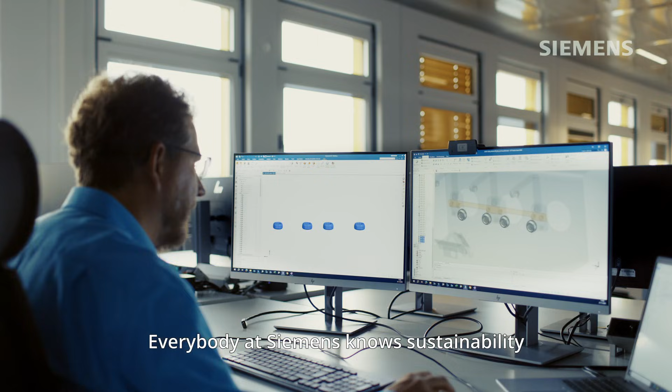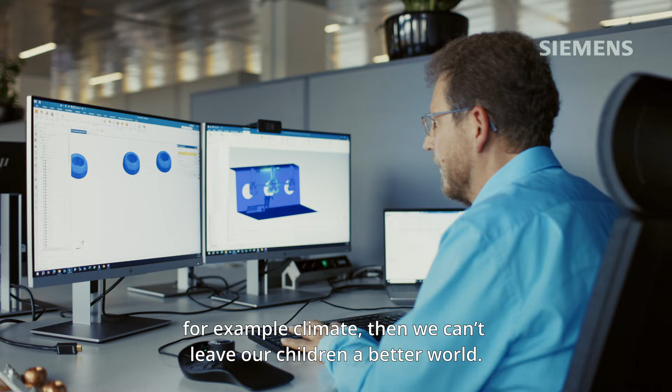Sustainability is a big topic for Siemens itself. Everybody at Siemens knows sustainability. It's needed to save our world. We have so many problems around the world, and if we neglect some problems, for example, climate, then we can't leave our children a better world. That's what I'm working for. I want to have that foresight that my children will also have a nice life, not only me. That's what drives me.

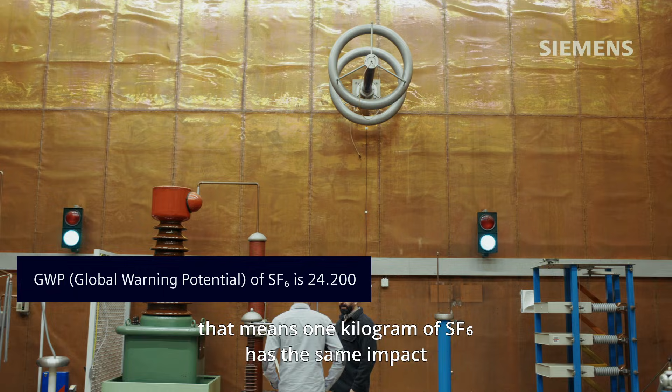The global warming potential of SF6 is over 20,000. That means 1 kilogram of SF6 has the same impact on our environment and global heating as 20 tons of CO2. And that's important for the environment and our society.

When we look at SF6, it is often used in switchgears because it has very good dielectric properties and thermal properties. But it has a flip side. SF6 has a negative impact on the environment because it has a high global warming potential. That means it will contribute to the greenhouse effect.

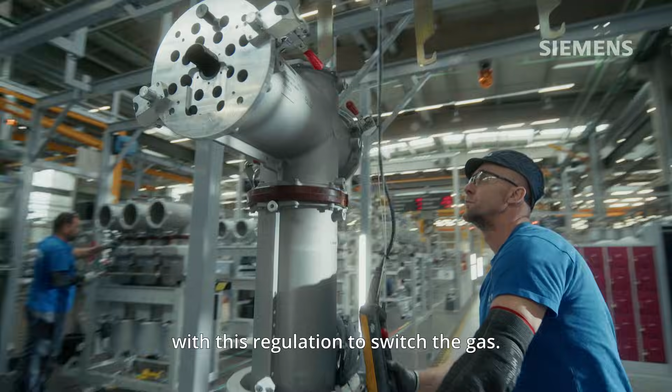And this is why, in the end, the European Union forces with this regulation to switch the gas. There was no further solution. We needed to switch, and we needed to find a solution for our future. If there's no SF6-free switchgear, the factory will be closed. We had to do something, and we found the solution.

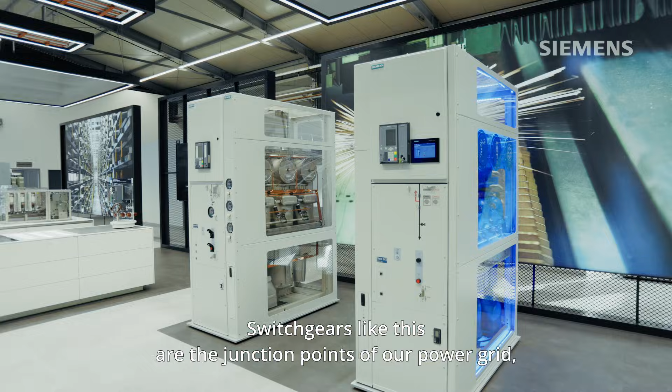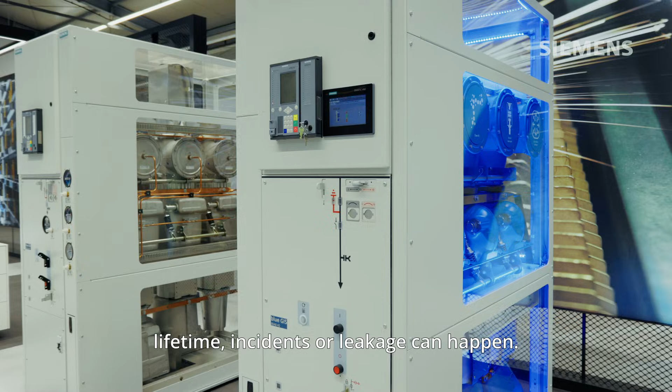Switchgears like this are the junction points of our power grid, and therefore they belong to our power infrastructure. Switchgears with SF6 are very safe, but over a long lifetime, incidents or leakage can happen. So the Blue GIS technology only uses natural gases, which are part of the ambient air. So we have no impact on our environment in case of accidents.

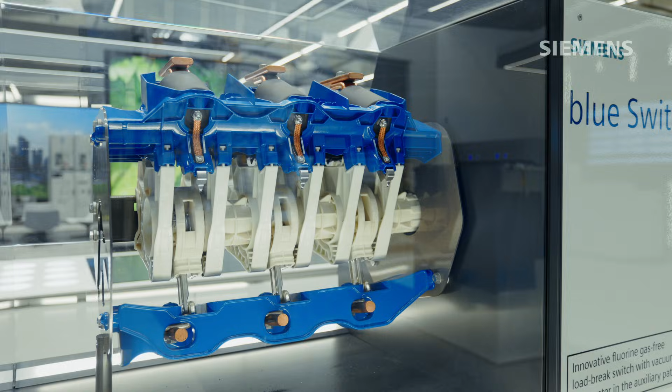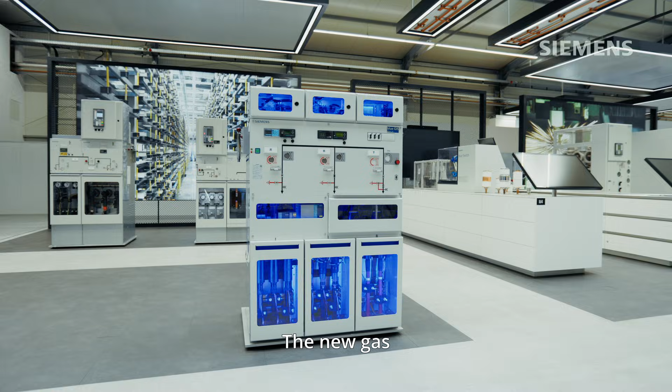For some applications in the energy business, fluorinated substances are also still used as a replacement for SF6. They fulfill the requirements, but they are not that sustainable. The new gas in the Blue products is based on a mixture of naturally occurring gases and is more sustainable. We use a gas with a low global warming potential, and it's not toxic. Therefore, it's a good solution for the environment.

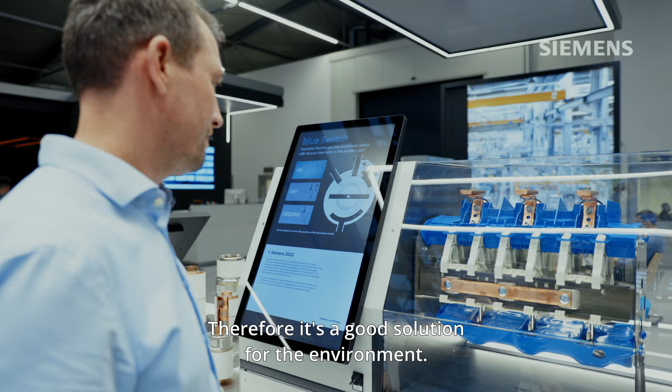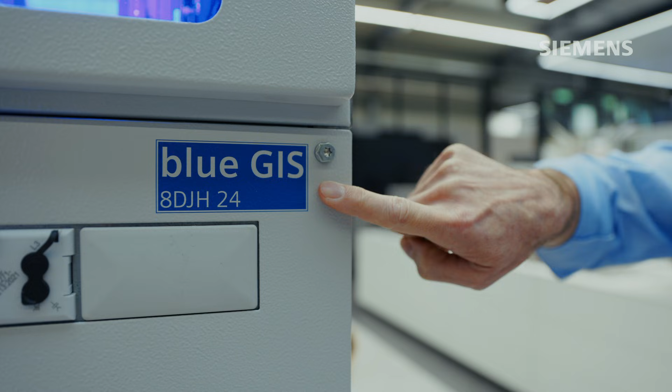SF6 is the best technical solution that you can use in a switchgear. You have small distances and can realize small products. Critical is to emit SF6 into the environment, and that is why we eliminate SF6 from the whole supply chain. Instead of SF6, in our Blue GIS, we use natural origin gases: oxygen, nitrogen, and CO2.

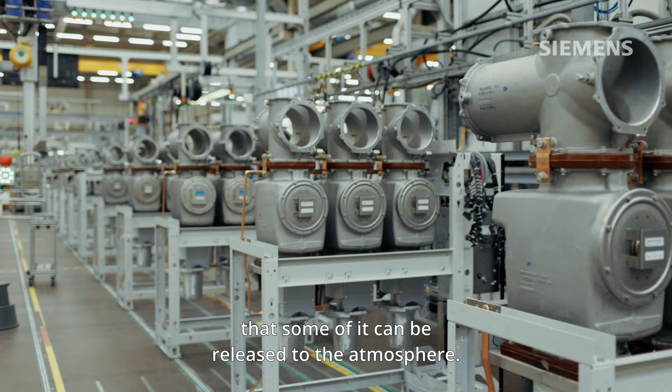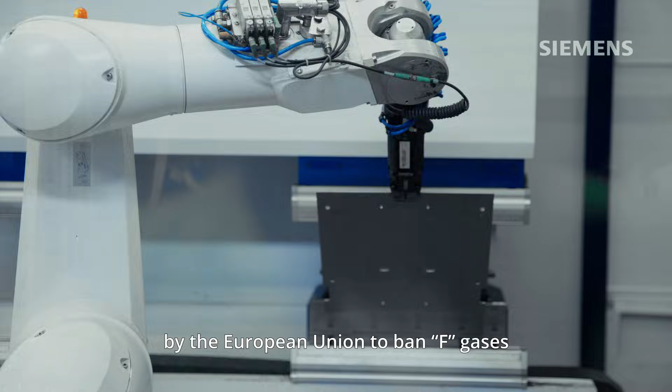And if there is no SF6 in the switchgear, there is also no risk that some of it can be released to the atmosphere. We didn't develop this gas. It's part of the surrounding gas, so nearly perfect for us, but maybe a challenge for others. It has been decided by the European Union to ban F-gases because F-gas-free technologies have reached application maturity, because we have been working on it for a couple of years, and now the time is right.

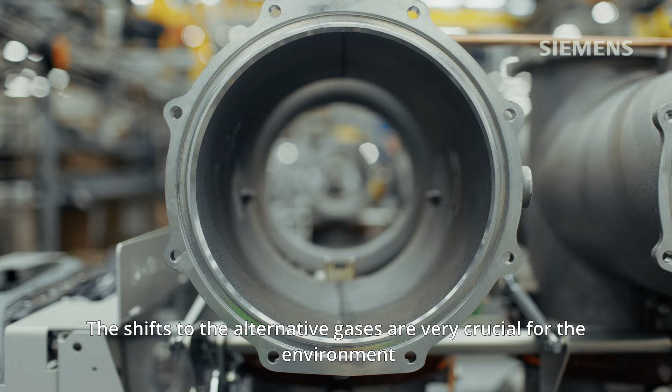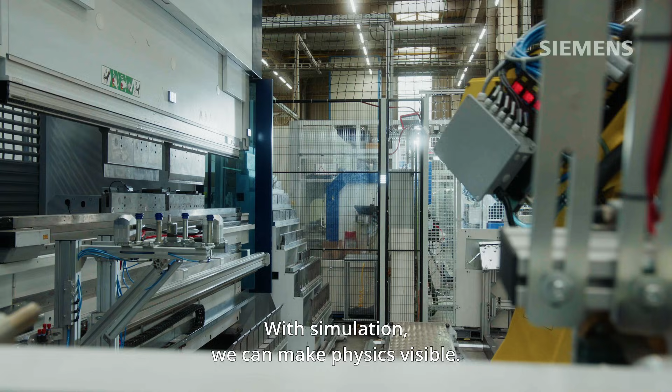The shifts to the alternative gases are very crucial for the environment and sustainability. There are also technical challenges. We have to understand and address them to be ahead and succeed. With simulation, we can make physics visible. We can look into our products and see what has happened. We combine physics and we can help our designers.

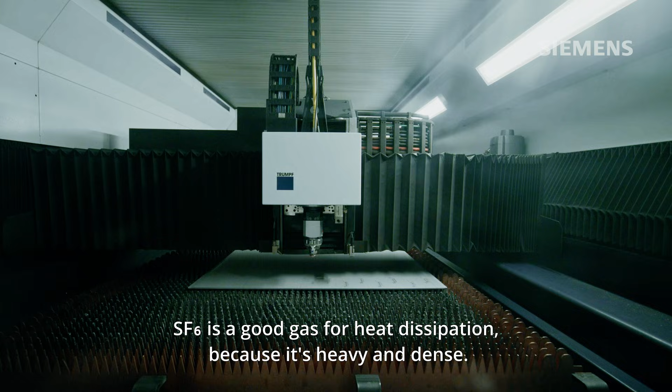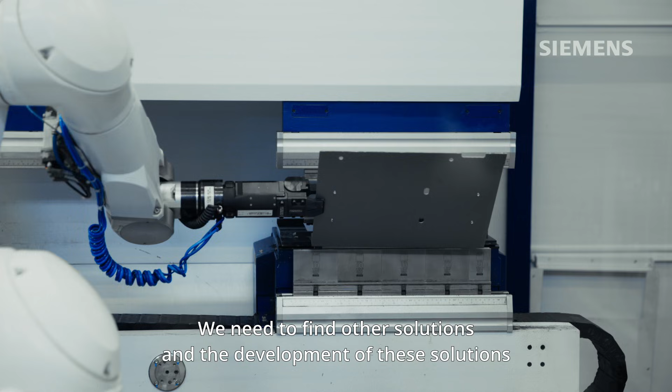SF6 is a good gas for heat dissipation, because it's heavy and dense, and that's not the case for natural origin gases. And if you want to do it with natural origin gases, we have to take care of heat dissipation. We need to find other solutions. And the development of these solutions is supported by Damien's multi-physics thermal simulation.

Hi, I'm Damien Barron, I'm a simulation engineer, and I'm a member of the R&D team in GIS. I am doing multi-physics simulations that support our design teams. They are simulations where you can combine several physics, and I am also doing innovation projects.

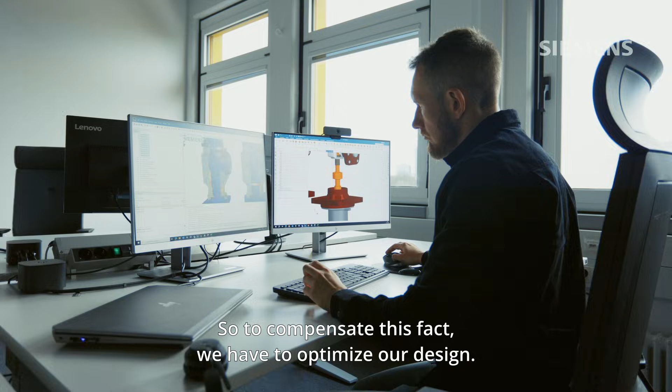From the temperature rise point of view, SF6 had very good thermal properties regarding the flow, and our new gases don't have such good properties. So to compensate for this, we have to optimize our design, meaning the current path and housing, and add more heat transfer possibilities.

When we faced this challenge, the temperature rise simulation really helped us, because with this multi-physics simulation, we could analyze the magnetic field and reduce the heat source on one hand, and on the other hand, we could optimize the flow, work with heat sinks, and optimize the design.

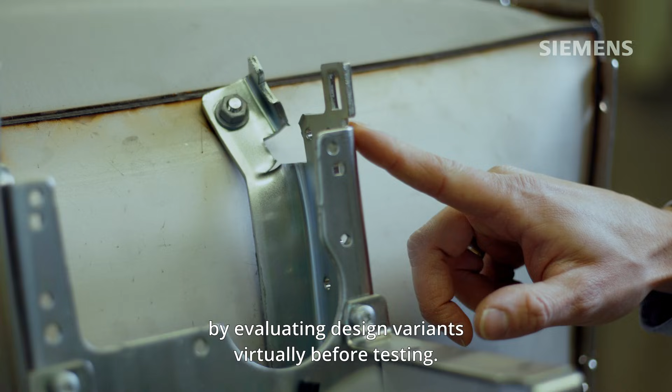My name is Uğur Yasavur. I am a simulation expert for structural analysis, and we played a crucial role in development. We reduced the need for a lot of testing by evaluating design variants virtually before testing. And it helps us to be on time and cut R&D costs.

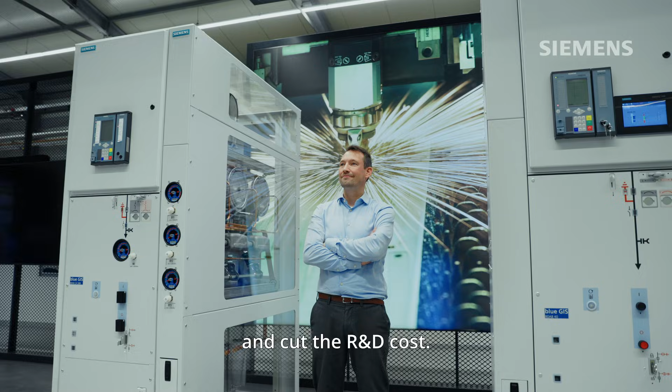My name is Markus Resch. I'm working for Siemens. I'm a team manager in R&D in Frankfurt, and I work for the technology innovation team

and my team called computational simulation. Simulations are digital twins, digital prototypes, and with these prototypes you can play, you can change the boundary conditions and use it before you realize a product. Innovation is our job. The BlueGIS story is just at the beginning, but I think it's the first step into the future.

My name is Christian Korolonek. I'm a simulation expert at Siemens. My main topic is structural simulation.

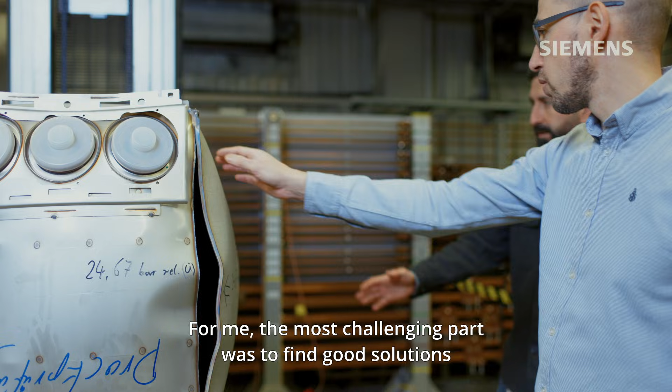For me, the most challenging part was to find good solutions together with our designers for the vessel design. Because of the higher pressure, it wasn't easy to find a good stiffener solution. Thanks to the simulation, we were able to compare a lot of digital prototypes to find the best solution.

My name is Achim Kalter. I'm Head of Technology and Innovations for Siemens medium voltage gas insulated switchgear. Most challenging was gas insulation with natural origin gases that have 3 times worse dielectric strength compared to SF6.

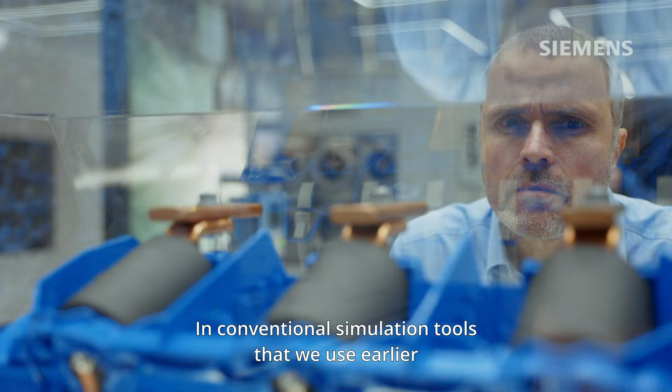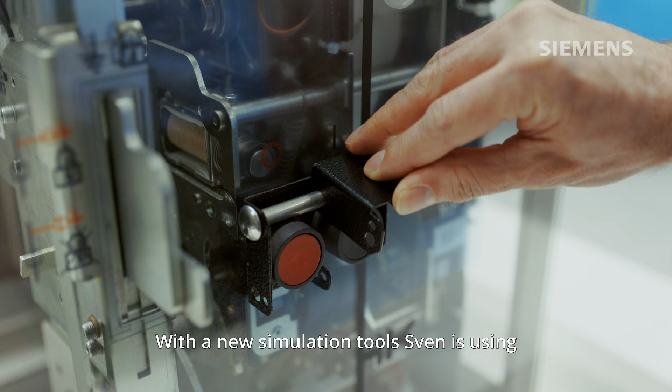What helps us here is the simulation that gives us a better prediction about discharge location. In conventional simulation tools that we used earlier, the electric field strength is displayed and the strongest point of the electric field. With the new simulation tool Sven is using, we are able now to predict the location of the most likely electrical discharge, the point where the gas breakthrough will happen.

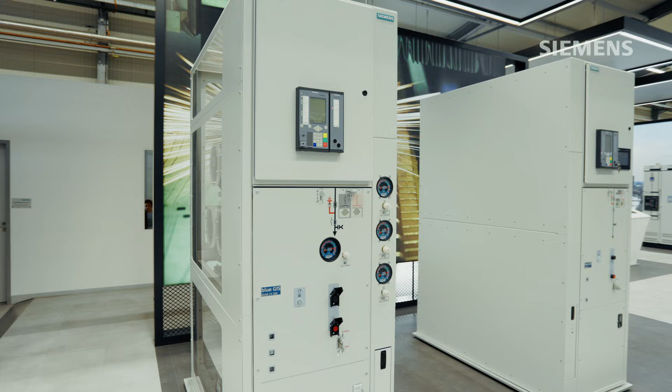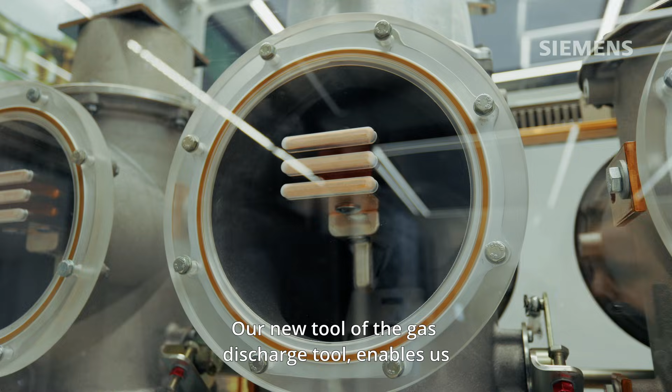Particularly for voltage levels beyond 24 kilovolts, dielectric simulation becomes more and more difficult with natural origin gases. Our new tool, the gas discharge tool, enables us to improve the dielectric strength with much less development cycles and less hardware tests.

My name is Sven Ettingshausen. I'm a simulation expert in the R&D of gas-insulated switchgears in Frankfurt, and I've been doing electrostatic simulations for 16 years now.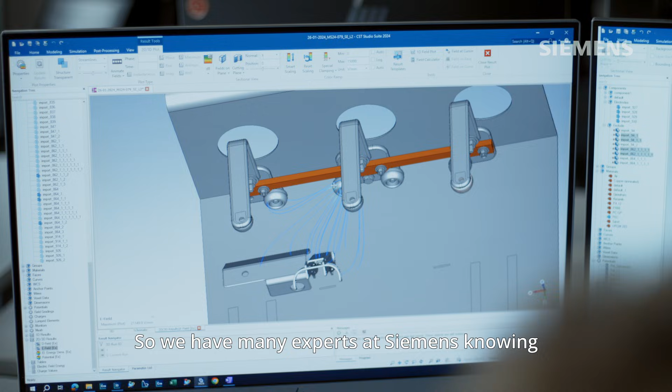The new gas is extremely difficult for electrical fields, so we have many experts at Siemens knowing very well how to deal with these new surrounding gases. So the experts give their knowledge to the new colleagues and to the older colleagues, and we collaborate. This way we can avoid starter mistakes and concentrate on the real topics of our switchgears.

So we have experience, for example, in our team for several years. Before I started, there were already electrostatic simulations, so let's say 25 years of experience in this direction. And all this knowledge helps us find the solution right now.

At the beginning, I wasn't sure what a simulation can contribute to sustainability, but then after a while I recognized that it can reduce the tests, accelerate the development time, and of course improve the quality of the product. The multi-physics simulation approach connects several physical phenomena, and this is a big advantage because in reality you can't observe physics in a single way.

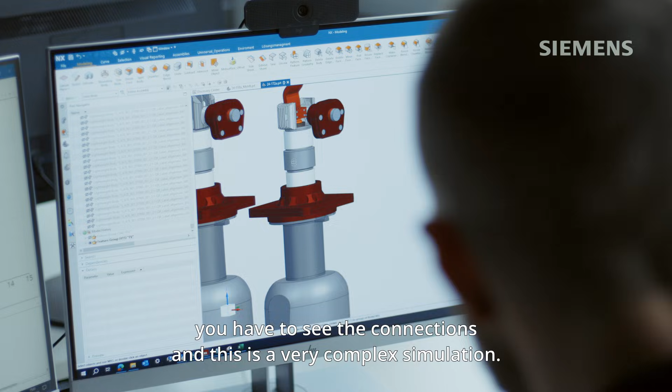You have to see the connections, and this is a very complex simulation. In this case we connect the magnetic field with the flow, and in the end you have this dependency of these two physical phenomena, which helps to analyze the whole picture.

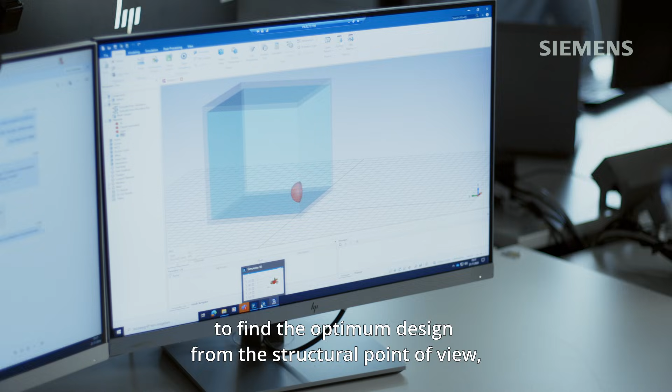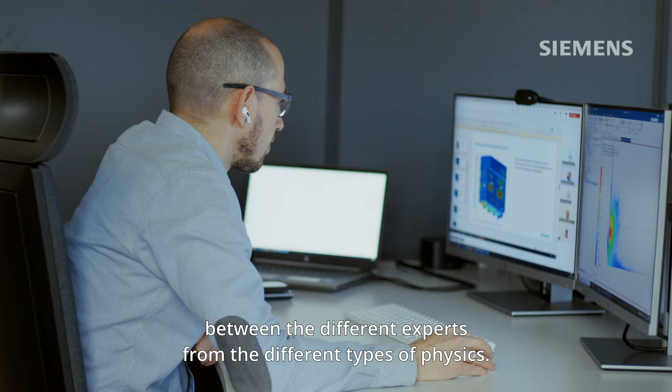The challenge was not only to find the optimum design from the structural point of view, because the switchgear also has to withstand the voltage and carry a very high current without overheating. It was solved by a lot of iterations and interactions between the different experts from the different types of physics.

It was very important for us to create virtual prototypes for a better understanding of the physics, to discuss these topics with our team members. There are a lot of challenges, like thermal, mechanical and electrical.

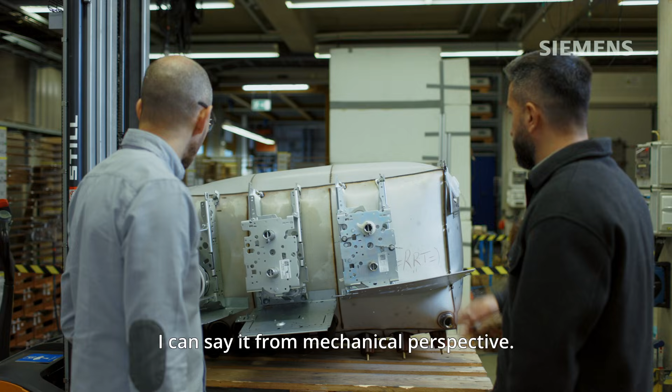I can say it from a mechanical perspective: we had to handle higher pressure by increasing the stiffness of the design, and we achieved it successfully through collaboration with our R&D colleagues.

When I talked to my family and my wife about my work and that I am working on a sustainable product like GIS, they were very proud of me and that I'm working on a product to make our future better and greener.

One person cannot solve the whole development of a switchgear. So it's teamwork. It's always teamwork.

I'm extremely proud of being part of the simulation team, but also I'm proud of being part of the R&D in Frankfurt, of being part of the collaboration with my colleagues in India, in China, of course USA, Czech Republic. So I'm a small individual in a very big world, and that's what makes it extremely exciting.

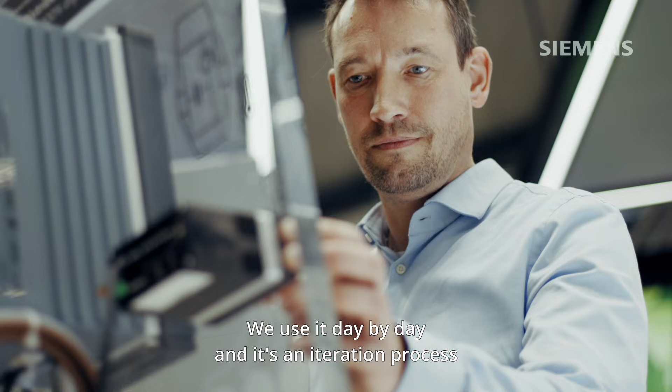Simulation is not a big major breakthrough. We use it day by day, and it's an iteration process in the R&D. It is established, and therefore it's more of a daily business.

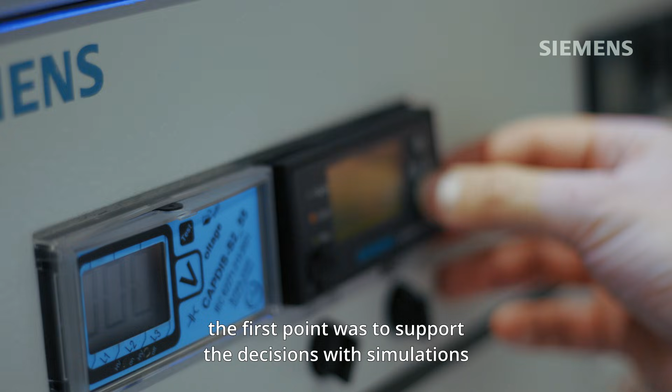From a simulation perspective, the first point was to support the decisions with simulations, and the second, to have the right tools and the capacity to support the R&D teams. The simulation team works closely together with our product development colleagues, with the testing department, and with other interface partners that make BlueGIS a reality.

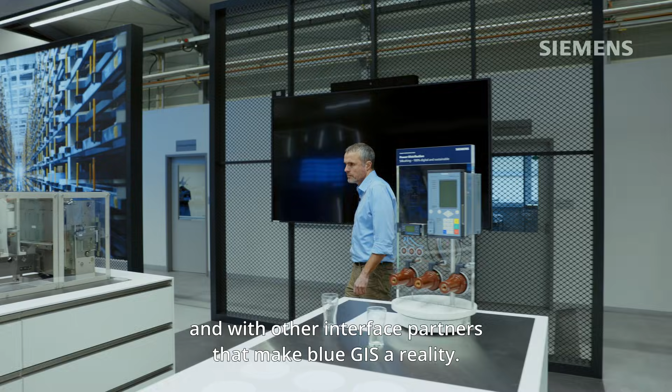I would like to see BlueGIS successful not only in Europe, where the F-gas regulation applies, but also in other countries that decide to ban SF6 and to make energy grids more sustainable.

We are the R&D department. That's our business, that's a big challenge, and for every challenge we find a solution.